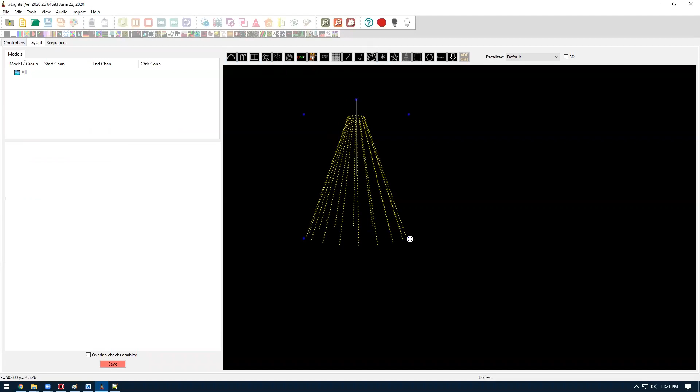But then from here, if we want to use this in our layout, let's add some models and configure it for the controller. Let's do the most basic thing first. Let's just do a mega tree. We'll do a 180 tree here. So 180. We'll do 16 strings, so that's the number of physical ports on the controller. And then we'll do 50 pixels up, so basically there'll be 16 strings of lights, 50 pixels long. So we'll just do the default.

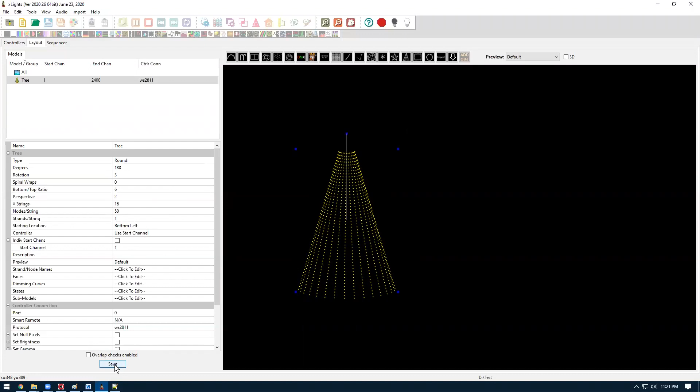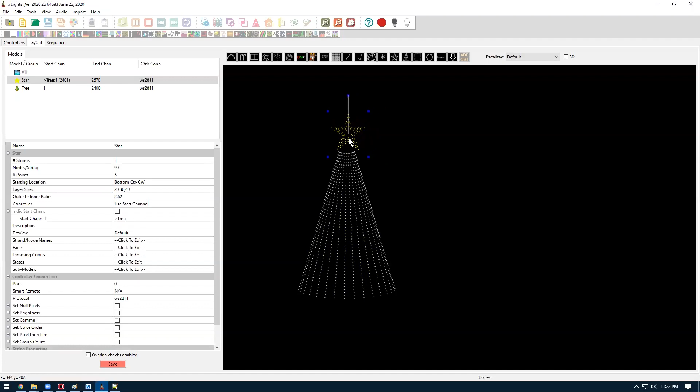Well, that's pretty standard. Let's add a star at the top. Let's do like a 3-layer star, so we'll have 90. And then we can do layers by doing 20, 30, 40. And this will basically make 3 layers of 20, 30, 40. Let's put that on the top of our tree. And then let's just do some other props. Throw some arches in here.

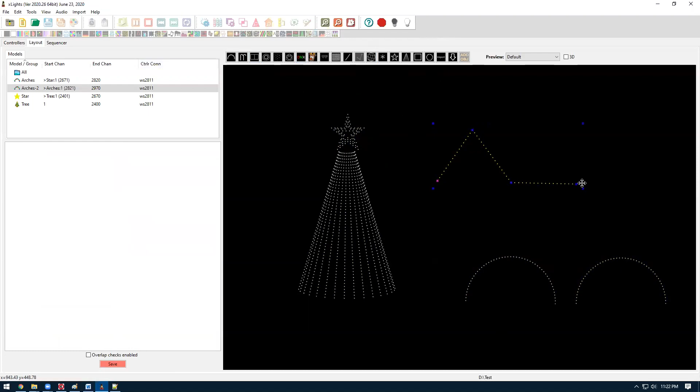And then let's do like a polyline for our roof line here. With a polyline, hit escape at the end to finish it. And let's say our roof line, let's just put a number in here of 250. And we'll just call that a good starting point. We got some models here.

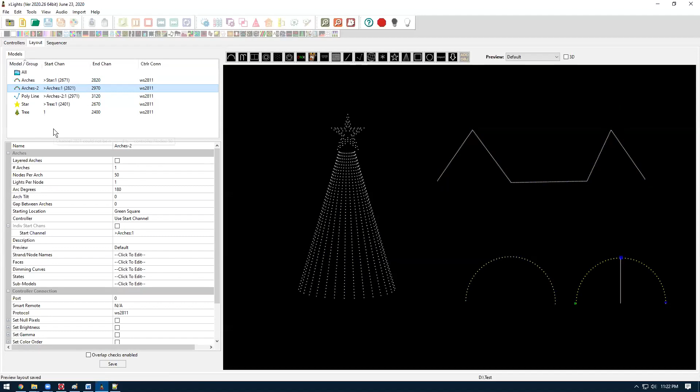And then now you can come in here and configure these manually for the controller, but kind of the newer way to do stuff in the 2020 version of xLights is there's this visualize option in the controller tab that lets you just drag and drop your models onto the physical controller port. So let's do that. Let's do the visualizer here. So in the visualizer, it shows you your ports on the controller and then all the models you have.

So as I kind of showed earlier, the local ports actually start at 17. So let's put our mega tree on that. So if we put our mega tree on 17, as you can see here, we had a 16 by 50 mega tree, so on port 17 it put the first string of it, and then it went all the way to 32. And then for this other stuff, let's say our star, we want to put that on port 32, but we want it after the mega tree. So we're going to have our mega tree go up and down, and then we'll just have this at the end. So we'll put that at the end there.

And then the other stuff, let's just say these are on receiver boards. So we're going to put them on our differential receiver. We'll just chain the arches after each other. We'll say that's one receiver board. And then we'll say our house polyline is another receiver board. So the first 4 ports is the first receiver board, and then we'll do 5 through 8 as the second receiver board. So that's just a basic configuration I have here. So once you're done, this automatically just saves as you go, so you should be able to just close it.

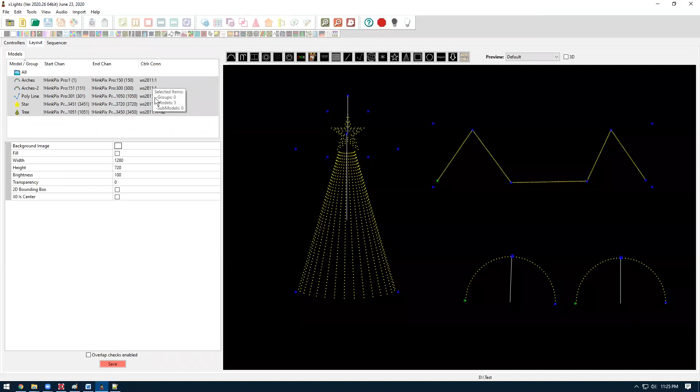Now that we have that set up, you can go back to the layout tab and you can actually see all the controller connections will display in this column as well. And we can also go in here and change settings if we want. So the upload for the HinksPix supports all of these settings. If they're not checked, by default it just won't set them, and it'll keep the controller default.

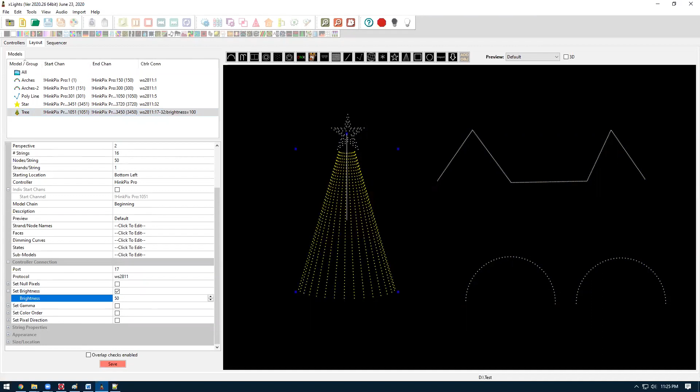But like if we wanted to go in and set the mega tree to be 50%, and we wanted the star to be 50%, we could add those settings right here, and then when we upload to the controller, it would configure the controller with those settings.

Now that we got everything we like, we'll just upload to the controller. We have to upload the inputs, which basically will tell the controller which E131 universes to listen to. And then when you upload the outputs, that'll upload the model configurations, so what pixels are on what port.

Let's do the inputs first. So we just click the upload inputs. Once it's complete, you should see this HinksPix upload complete here. And if you see anything that says failed, that means it didn't work. You may have your IP address wrong, or you may also want to check the version of the firmware of the controller. I'm currently running version 74 of the main firmware.

I have helped some people before. They've had version 50 and xLights didn't work with that. So you need to make sure it's at least probably in the 70s.

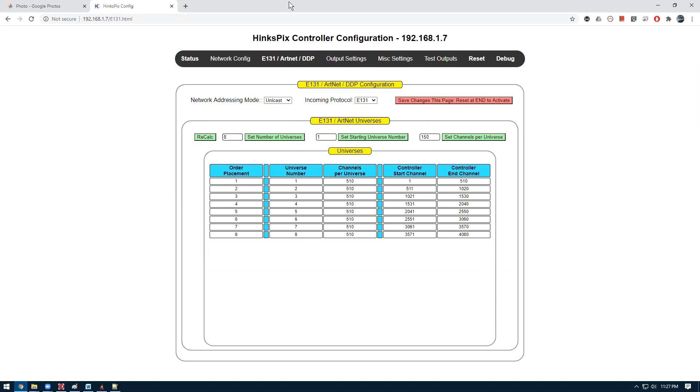But if we go to our E131 page here, you should see xLights uploaded those 8 universes. So when I hit the upload inputs, it uploaded universes 1 through 8 and set them up for us. If you look here, the channels per universe is 510, and it put all that information in for us. Okay.

So now that we have the inputs uploaded, now we need to do the outputs, and this will basically, as I said, put the output configurations of the pixels into the controller. Just click Upload Outputs. Okay, once we did the upload outputs, it'll come down here in the corner and say Upload Outputs Complete.

And then if we hit Open again over here, it'll open the controller back up. After it does this, it actually reboots the controller, so it might take a second for the controller to come back up. But first, let's go to the long-range differential ports. So these are the long-range differentials.

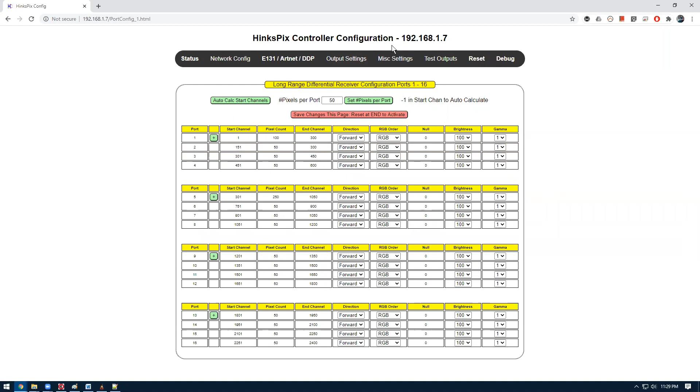If we compare this to our Visualize tab, on port 1, xLights put 100 pixels, so that's our 2 arches. And then on port 5, it put the 250 pixels, which is our polyline. That's the differential output, that's the first 16. If we go to the second one here, the SPI, this will be the local 16 ports.

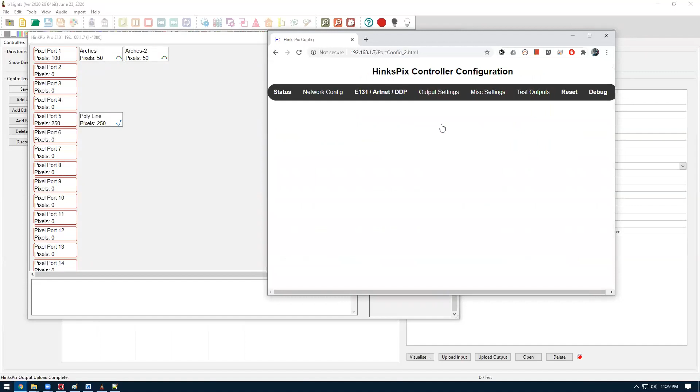And if we scroll down here, this should be our mega tree. So you'll see the 50 of the first 16, which match. And then at the very end, it should be 140 because of the star. So the 50 of the mega tree plus 90 of the star, we got 140.

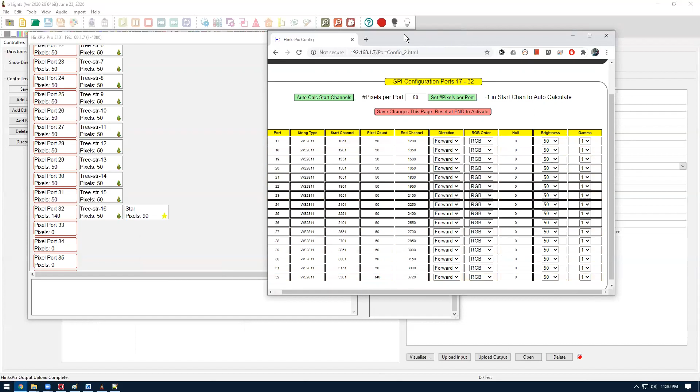And you can also tell it put the brightness of 50 that we also imported in the other tab. If you hover over this, it'll say brightness of 50 at the bottom there. It also put the brightness of 50 in the controller. To me, it looks like everything uploaded as it should. Now you can use this controller as an E131 output and drive your lights from xLights or FPP.

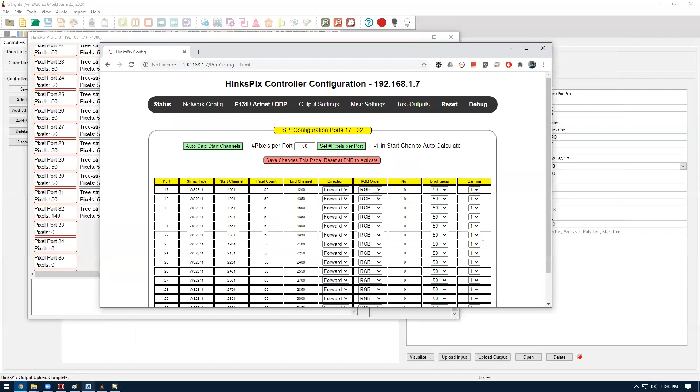There is the second thing with the HinksPix controllers: they also support a standalone running mode. You can actually upload files to an SD card and put them in the controller, and then you can just run the controller by itself. Here's a picture of my controller. If you can see, there's this SD card reader that you just put it in.

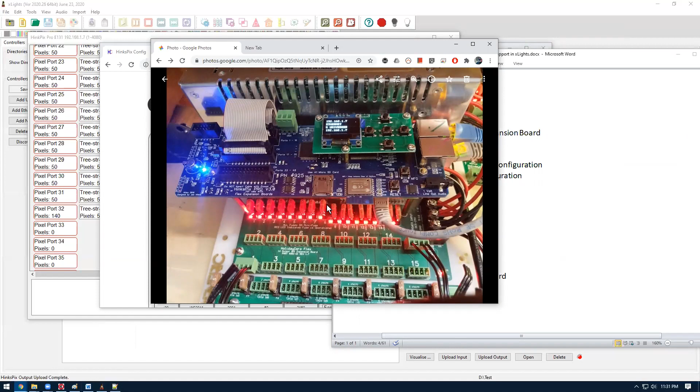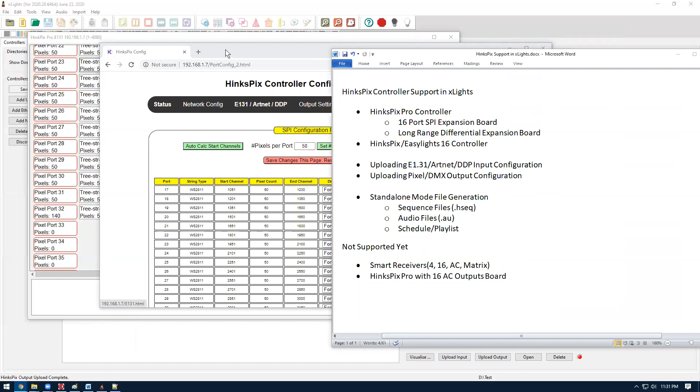And with the HinksPix Pro, there's also an audio output jack. So you could plug this into your FM transmitter, and if you have sequences with music, this would play the sequence on your tree and play the audio through the audio output. In xLights, there's a dialog to do all this stuff. Let's just close this and we'll go to Tools. Under Tools here, there's the HinksPix Export.

And so this dialog is what you would use to create these files. Let's just talk about the files a little bit first. So the HinksPix needs, if you're just going to do a sequence that has no music, what's called an HSEQ file. This is similar to an FSEQ, but it's got a little different header information for the HinksPix controller. If you're playing an audio song, it requires an AU file, which is similar to a WAV file, but it's got a little extra information. And then there's also a schedule and a playlist file. These are all generated by the export dialog based on the settings you put in here.

Basically, all you would do is select the controller, select the mode that you want the controller in, and then where your SD card is. We have our HinksPix controller here. If we want to create the files for it, we check it, and then this should populate. If you set this up as a HinksPix in here, it should know that this is a HinksPix and populate

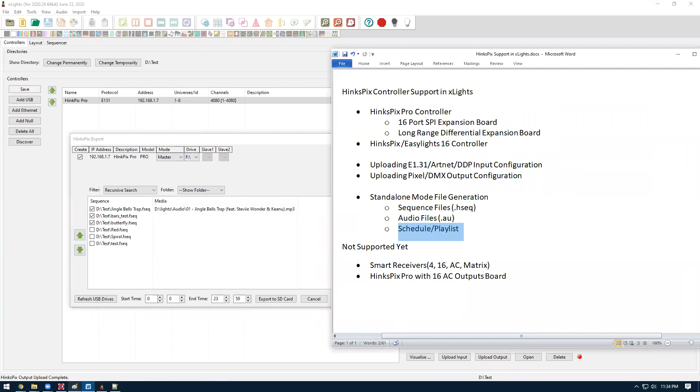In the dialog, there's an option for slave 1, slave 2. The HinksPix can only drive approximately 50 universes worth of data on one of these slave controllers. So if you're using one, it can do about 50. If you're driving two, because you can actually drive two with the HinksPix Pro, it can only do 50 total. So you have to keep it about 30, 32 on one and about 16 on the other as the max.

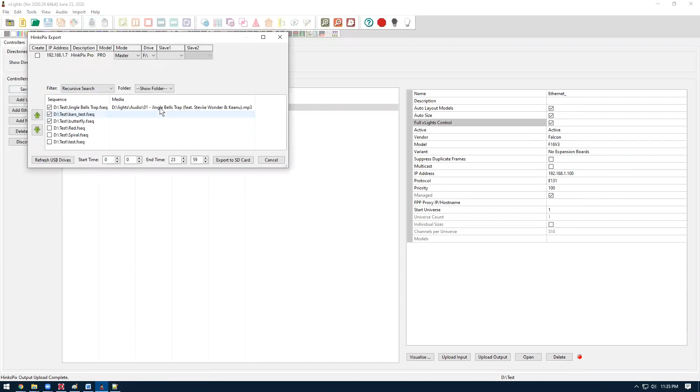But if you were to set up in xLights here, let's say we want to add a second controller. I have a Falcon plugged in as well, so we'll put the IP of the Falcon I have on my network. We'll put the vendor as Falcon F16V3 here, and we'll hit save on that. Then when we open the HinksPix export dialog again, we'll see now that for this slave, we can select the controller. I didn't change the Falcon's name from the default, so it's just called Ethernet.

If you enable this, now when I generate the files for the HinksPix, it'll also include the E131 data for that Falcon, and it'll send that data to that slave controller. So your HinksPix will basically be the master, and it'll send lighting data to the Falcon as its quote-unquote slave controller. That's the more advanced things you can do with it. I'm just not going to do that. I'll just do the default here.

This setup is basically you have a single controller and it's just files locally for that controller. This mode select dialog says if it's the master or remote controller, or there's an option to don't set. When you set it as the master, this will generate a file on the SD card, and once you plug the SD card into the controller, it'll automatically put the controller in master mode. If you put it to don't set, it won't generate that file, and the controller will stay in whatever its previous mode is when you boot it up.

So if the controller is currently in E131 mode, it won't change it to standalone master mode when you put the SD card in. I think it's good to put it in master, because then once you put the SD card in, it'll automatically switch it over to master. This is the drop down of all the drives on your computer. My SD card is the F drive.

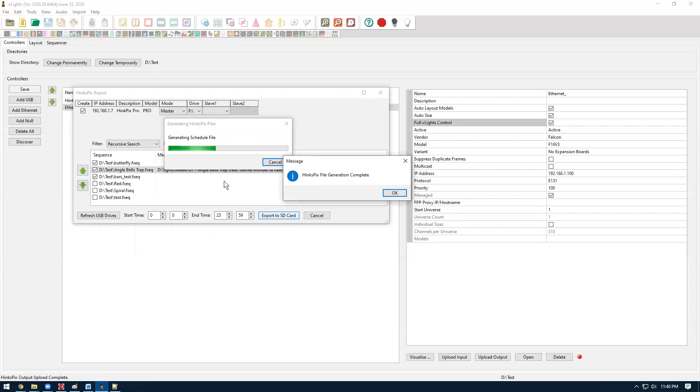And once you have everything set up how you would like it, you can just hit export to SD card, and it should generate all the files here. So once it's done with everything, you'll get this box saying it's done. And the reason it does that is if you had multiple controllers, you could then uncheck that one, check the next controller, swap out the SD cards, use the same SD reader, hit export again, generate the second controller, and so on and so forth. So you don't need multiple SD card readers. You can just use one, check it, generate it, check the next one.

Let's look at what it actually did here. As I was showing in the document there, it makes these HSEQ files. So these are the physical sequences. The names may be a little different than what they are in xLights. As I said, I reverse engineered this from Joe's stuff, and he always used uppercase, so I did the same thing. And I also removed spaces because I don't know how that'll work on his controller. The first two there are just those animations. And then this is the Jingle Bell sequence, and the AU file is the audio sequence. So this will basically play back audio on the SD card.

And then all the other files in here are related to the schedule and your playlist. As I said, from the order in here, it'll generate this playlist file. And if you actually open this up, it's a JSON file, if you know what that is. And it'll basically have the order of your sequences. So Butterfly was first, then Jingle Bell, then the bars test. So this will be the order it plays back.

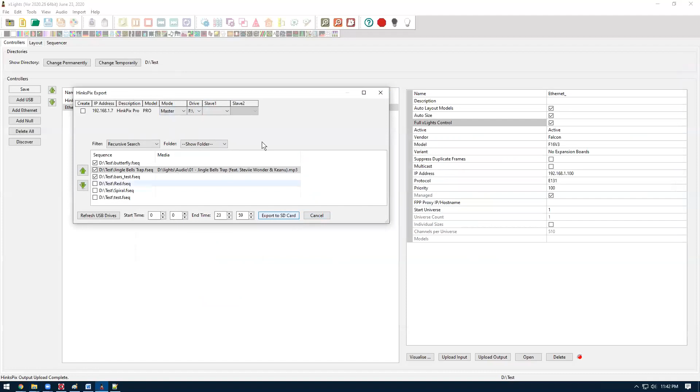That's the basics of the SD card. At this point, you would just take this SD card, put it in your controller, and if you reboot it, it should just start playing. I don't have a good way of showing that because the web GUI doesn't actually show you anything, but that's the basics of it.